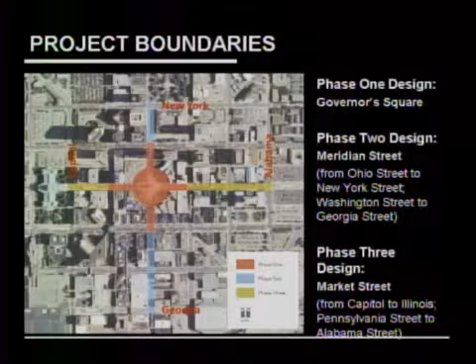The blue area that you see along Meridian Street will be the second phase of construction, where we'll work on those spokes. Then finally, we will work on the Market Street area. I'll talk to you a little bit about what that schedule is in a bit.

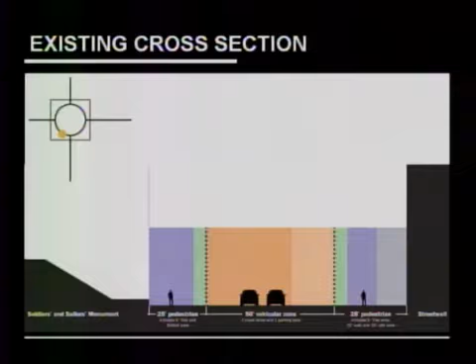Now, there are many different reasons why we have to look at reconstructing the circle. The majority of that reason is because the infrastructure is deteriorating. Over the years, DPW has replaced the pavement and the bricks in order to try to maintain this roadway.

The existing pavement and bricks you see down there now have been in place for over 35 years. The sub-base, which is the concrete base underneath the bricks that holds them in place, is over 60 years old, and what's really happening is that sub-base is deteriorating.

And so it's causing the bricks to loosen. It's causing water issues — we're seeing water damage to some buildings. It's puddling up on the street and really deteriorating the entire system.

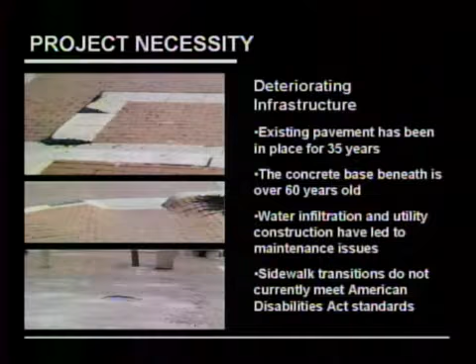Finally, a lot of the sidewalks there do not meet the current ADA requirements from the federal government. So in undertaking this project, we're looking at how do we make it more modern, but also how do we make it current with all the standards and codes.

We also have a lot of obsolete infrastructure in this particular area. As you see from the pictures here, when we need to close down the circle for events, we have to use a variety of gates, cones, and police cars to close the circle and make it safe for these events. It becomes very costly for the people who rent out that space, as well as the city, in order to shut that down.

Additionally, there's no signage leading up to the circle telling people the circle's closed, that they shouldn't travel to the circle, and that they need to move out and go a different direction to get around it. So those are things that we're looking at.

And then finally, the infrastructure in terms of lighting, electricity, sound, and water systems to access water to water the plants is not in place right now.

A lot of times we have to bring in extra transformers when we have big production shows on the circle. We've now had IPL install particular electrical boxes that people can charge their phones on the circle. As technology has changed, the circle has not quite kept up, and so it's been difficult to program events in this area.

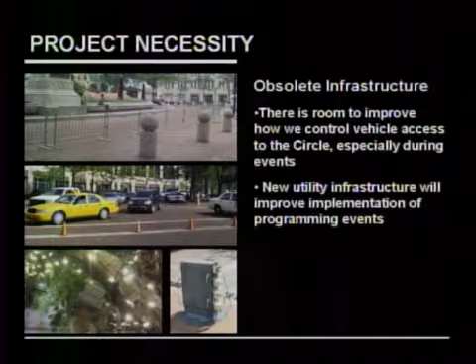So what are the goals for this particular project? Well, of course, the big and most important goal is that we improve the aging infrastructure, bring it current to how we're using spaces these days, and really promote efficient movement of vehicles and pedestrian traffic. We want to increase the walkability and accessibility and really create a sense of place amongst the circle.

That it had, back when it was first created in the 1800s. The circle is the center of our city, and so we're trying to figure out how do we really increase and better connect with other areas, whether it's University Park, Georgia Street, the Capitol, the Cultural Trail. How can we enhance these connections and make it a transfer point to all these other spaces that we have in the city?

And then finally, we really need to figure out how do we begin to operate and proactively program this circle, other than the events just coming here, and how do we maintain this specialized infrastructure that we have on that circle?

So as part of this process, we will be defining the characteristics of a management entity who would need to oversee the programming and the operations of the circle and help to coordinate permits and events that occur there.

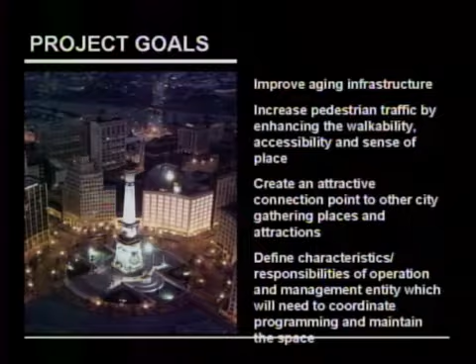Now, the entire reconstruction project goes beyond just redesigning a street and adding in streetscape. There are so many other components to what we're doing. Besides doing all of the design of the street from building face to building face, we're redesigning all of the infrastructure underneath the ground. We're looking at traffic and how it moves through the circle, both pedestrian, bicycle, vehicular, and how we can connect to various transit points.

We're looking at programming. How can we in the short term activate this space even more on a day-to-day basis versus how do we end up programming for the large events that are going to occur several times throughout the year? And so we're working on a programming phase on this.

As I mentioned before, the project is not funded at this point in time, and so we're putting together a funding strategy to determine what are existing sources that we could capitalize on, and then how do we leverage federal funds. And then, of course, there's the large public outreach, because while this does affect the tenants that are along this place.

Everybody knows the circle across the state, and it evokes an emotion and an opinion on what to happen in this particular area. So we have to have a very strong public outreach component. And then finally, we're looking at how do we enhance the space with various public art.

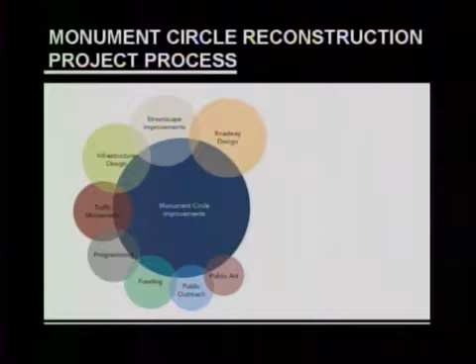Now, in terms of our project process, we've gone out and examined the space. We've watched how traffic moves through this space, watched how people use the space, and watched the turning of trucks trying to get in and maneuver in and out of the alleyways.

You see some pictures here of the various events that we've attended. We try to go out and attend every single event that is on this space so we can see how they set up their tents, where do they set up their tents, what's the impact to the existing businesses, what's the impact to the traffic, and how do pedestrians then flow through the space?

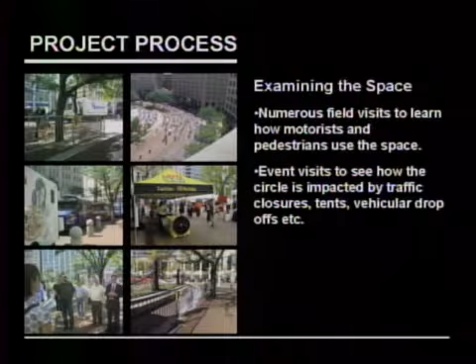Because what we're trying to get from that is understanding what other design enhancements can we make that will help facilitate and ease programming into this various space.

As I mentioned before, we have a strong public outreach campaign, and so we're now in, if you will, the second phase of this project where we're into the design part. We've already had numerous stakeholder meetings. We've held a kickoff meeting with the tenants and discussed what we were going to do on the space so they knew who the project team was and how to contact us.

We've had property management discussions, even talking about how our uses might change in this space. Are there other vacant lots that might be developed over the period of time, and how's that going to impact this roadway and this corridor? We've had various media briefings and public meetings.

We have a social media platform that we're working on. We'll have booths at community events, and we're also conducting specialized focus group meetings focusing on programming and design and the like. We're really trying to engage the public in the conversation about this space because it is unique and important to the city.

Last fall, we held a placemaking workshop with a variety of entities and people who care about this space. We walked around the space to understand what's been going on and what ideas we could generate for future programs in the area. We brainstormed other partnerships and potential infrastructure and design changes that people wanted to see.

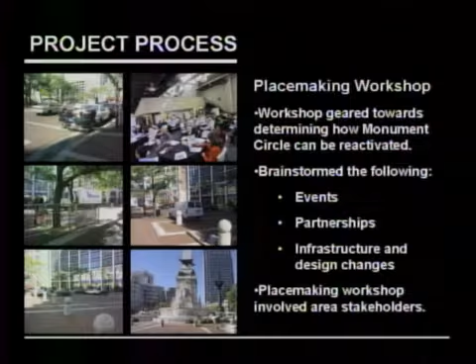We then held a design workshop with the project team, our client the City of Indianapolis, and various stakeholders. Ultimately, we started to figure out some design concepts for the circle and these intersecting streets. It was a 4-day event that we kicked off with a presentation highlighting the issues and what we'd heard at the focus group meetings and the placemaking workshop.

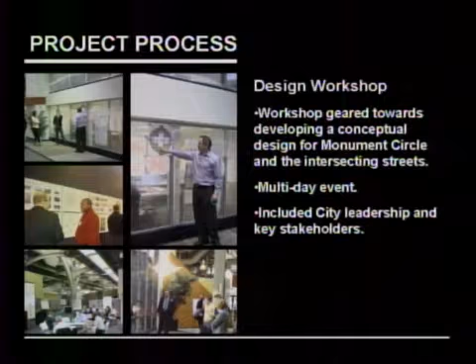The design team worked day and night through the next couple of days, then gave a final presentation on the 4th day about some of the concepts and things we could do with this particular space.

Right now we're really focusing on programming. The ultimate goal, while we know we need various pedestrian amenities, is to create a flexible space. From a programming standpoint, we're trying to figure out how to activate this space on a day-to-day basis, and how to get people to use it for more than just sitting on the monument, admiring it, and watching people move by.

We're looking at how to offer a variety of programs and events all year round. So not only are we activating it daily, but what are some major things we could do monthly that could then become an annual tradition?

We already have some things, like the Circle of Lights. We talked about how to increase pedestrian access, bike access, and transit access, and connect to multiple destinations, so people see this as a destination to come to, not just somewhere to pass through on their way elsewhere.

Ultimately, we need to be flexible with the design so that various elements we put into the space can be moved around and configured in different ways to support this programming.

So what we're looking at is starting with some short-term interventions—what can we do right now, before we redesign the space, to get people thinking about reactivating it and using it more from a day-to-day perspective?

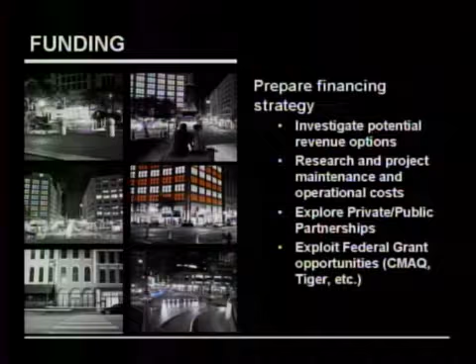And then finally, we're really trying to leverage federal grants. There are a lot of programs out there, such as CMAQ and Tiger, that the federal government has that we could leverage for this particular project because it's a unique project—a multi-jurisdiction, multiple-tiered, multiple-layered project that checks a lot of the boxes on these funding mechanisms. So figuring out how we leverage those and bring those dollars into the city to help revitalize and revamp this space is really another one of our strategies.

Now, in terms of the conceptual design, we are looking at the total reconstruction of the circle. As you can see there, we go from building face to building face. We are looking at making the entire circle flat so that it would be a curbless environment.

Right now, a lot of things we're hearing is that people are tripping over the bricks and the curbs that surround the planters, which have become problematic for people getting out of their cars and trying to enter into these particular buildings. We're looking at replacing the brick pavement down there and enhancing the sidewalks. I'll show you a cross section in just a moment about what we're doing.

We're reducing the driving lanes. So instead of having 3 driving lanes, we're going down to 2 driving lanes, while still keeping that flex parking and loading zone, but also allowing that to be used for programming.

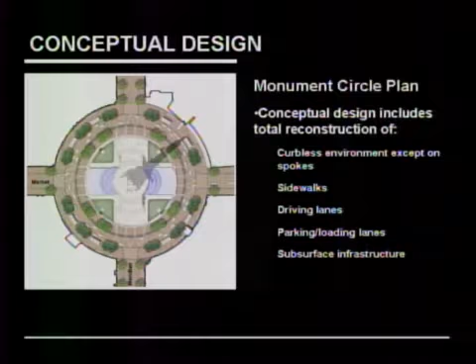We're also rebuilding all of the subsurface infrastructure. So we're looking at how we treat drainage, what we do with the electrical systems, and how we can incorporate more light and sound. We're really not only providing light from a safety perspective, but also enhancing the buildings and showcasing the architecture of the monument, its statues, and the surrounding buildings. So those are some of the things that we're looking at.

As you can see here, we zoom in on one of the quadrants. We're looking at what we call a 40, 33, 27 cross section, where we're going to increase the pedestrian space from the buildings out to 40 feet. So we really have this grand promenade that people can walk around.

As I indicated, we're going to reduce the roadway to 33 feet, so we only have 2 travel lanes, and it really is not going to impact traffic that much. Most people these days, if you're out watching them, only use 1 lane of the circle to travel around, not all 2 or 3 lanes that are out there. A lot of times you'll see emergency vehicles and other vehicles parked in either the inner or the outer lane, and it's still not disrupting traffic. So we believe going down to 2 travel lanes, we're not going to be impacting that.

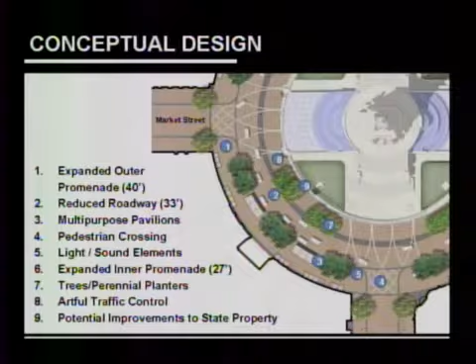We're expanding the inner promenade, which is where the state property is, to 27 feet, so we can activate that inner space around the circle. We're looking at how we make the monument more ADA accessible to a variety of people coming to these particular areas. And then we're rethinking the pattern and design within the pavement, as well as how to add little pops of color within the area.

As I said, this is kind of what the cross section would look like. We have the outer promenade at 40 feet, which is what would be up against the buildings. What we're looking at from a programming standpoint is how do we put in additional cafes and outdoor areas that people can sit in and partake and enjoy the views.

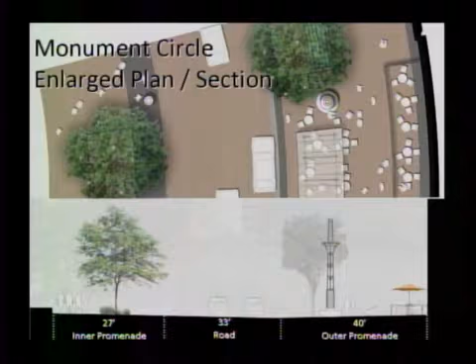We've narrowed the road down to 33 feet, so we have 2 cars and a parking loading flex lane—actually the parking loading flex lane is on the outside of the outer promenade. And then we have the inner promenade, which abuts the monument, where again it gives us the ability to add more activities going on closer to the monument and activating that space.

In terms of the spokes on Market and Meridian, we are looking to utilize a similar concept, narrowing the roadway there, making the lanes a little bit tighter and narrower, so that way we can expand the sidewalks and try to incorporate cafe zones along the various spokes.

We're looking to put in a 6-foot amenity zone, so again, tables and chairs for people to sit on, benches. We're also looking at trees and planters, adding some pop and color and life to those particular spokes.

Some of the other concepts we've been toying with is where to put bike racks. Of course, Indianapolis's bike share program could be implemented in these particular areas. And one of the big things we've heard is public restrooms, so we're looking at the concept that Portland is using right now and how we might bring that here to Indianapolis.

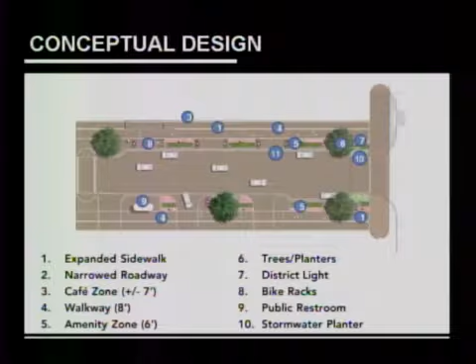This is a conceptual design. Chances are when you see it, it will not look like this once we get the final design done. But we're figuring out how to provide uplighting to buildings and to the monument, as well as lighting the paths and the benches where people could sit.

We're working on how to incorporate sound into the light structure, so when we have events and concerts on the circle, that could be heard all the way around. And then also these conveniences of people being able to plug in their iPhones, iPads, or Android phones to charge them while they're out there. So we're trying to look at how we incorporate technology and modernize the circle from that perspective.

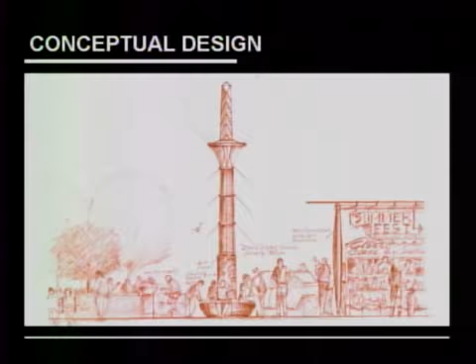We're also looking at wayfinding, so these can provide people directions within the city, but also talk about the historical significance of the monument and this particular space.

One of the other things we're working with the city on is looking at how we use this potentially as a sponsorship platform to help generate revenue to support programming and maintenance for the space. So again, these are just some concepts, not necessarily what the final design will look like.

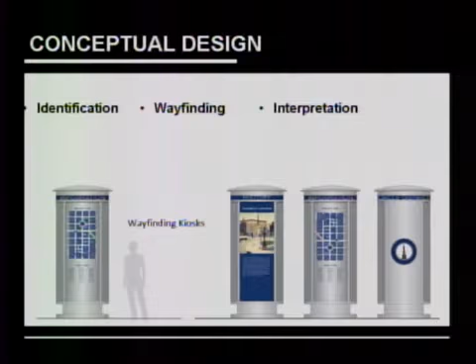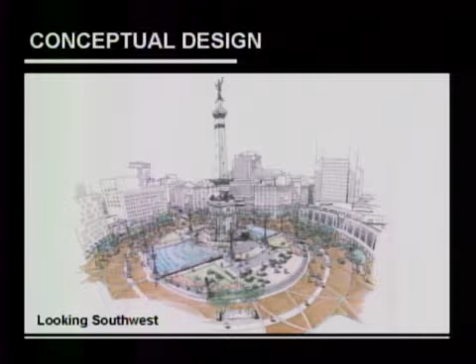And then finally, I just want to leave you with some potential images. These are images we developed during the design workshop to begin to really help provide the public with a vision of what this space could be when it's fully engaged.

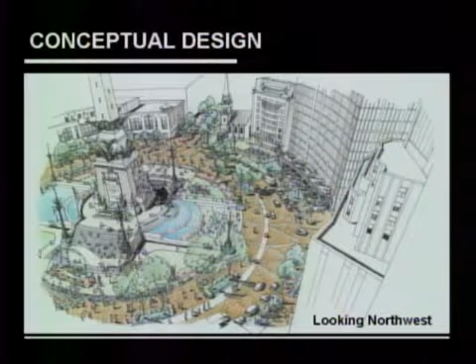And so we have a couple of different views, as you see, showing how we can activate the space and how we can provide more programming and events and really enhance it without impacting pedestrian and vehicular movement.

In terms of the schedule, we started the design of phase 1 to look at the whole entire area and figure out conceptually what we could do for the entire Monument Circle district. We completed that in January of this year. A couple of months later, we started what we call design phase 2, beginning the 30% design of just Governor Square, and we will have that completed by November 2014.

Some of the things we're looking at: we're completing the survey of the particular area, especially important is the vaults that exist underneath the pavement and attached to these buildings. We've gone out and completed that survey, and we're doing 30% design plans for Governor Square.

We've also been doing a lot of public outreach, focus groups, and tenant meetings. We're looking at having a community booth before the summer ends, and we're slated to have our public meeting in early November where we unveil the 30% designs and get public feedback. We'll also be outlining the characteristics of the program and management organization and what the city should be looking for.